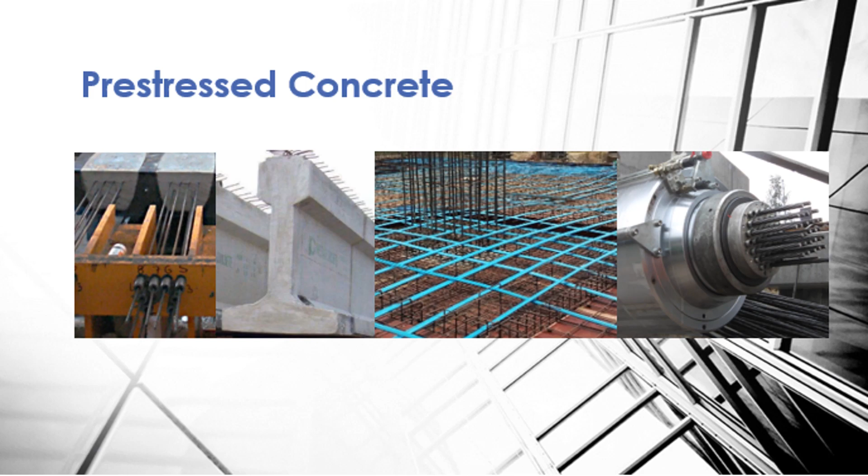As you know, concrete is very strong in compression and weak in tension. Therefore, a simply supported plain unreinforced concrete beam subjected to an increased load will fail immediately after the development of cracks. However, providing suitable steel reinforcement to the same beam can result in higher load carrying capacity.

As opposed to reinforced concrete, where the concrete is allowed to crack under service load, the original development of prestressed concrete was based on the prevention of flexural cracks forming under service loads. This was achieved by applying the criterion of no tensile stresses, because it is generally accepted that if there is no tensile stress present in the concrete, it will not crack. However, the design will depend on the requirement and the designer's choice.

With the subsequent development of the concept of partial prestressing, significant tension and controlled cracking are allowed to develop at service load levels, in much the same way as in reinforced concrete.

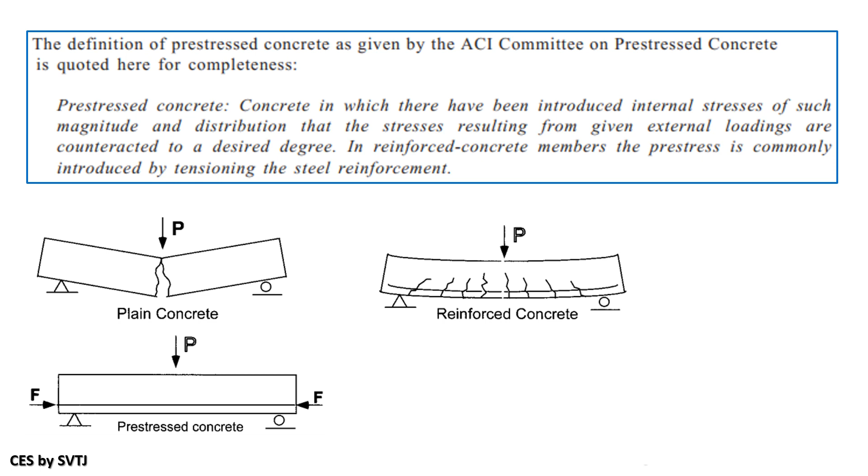In prestressed concrete, the most commonly used method of applying the prestressing force to the concrete is by tensioning high strength reinforcement, commonly referred to as tendons, against concrete prior to the application of imposed load. Two different processes can be distinguished in this regard. Pretensioning: in pretensioning, the prestressed reinforcement is tensioned before the concrete is placed. The other method is post-tensioning. In post-tensioning, the prestressed reinforcement is tensioned after concrete has been placed and has developed sufficient strength to sustain the induced stresses.

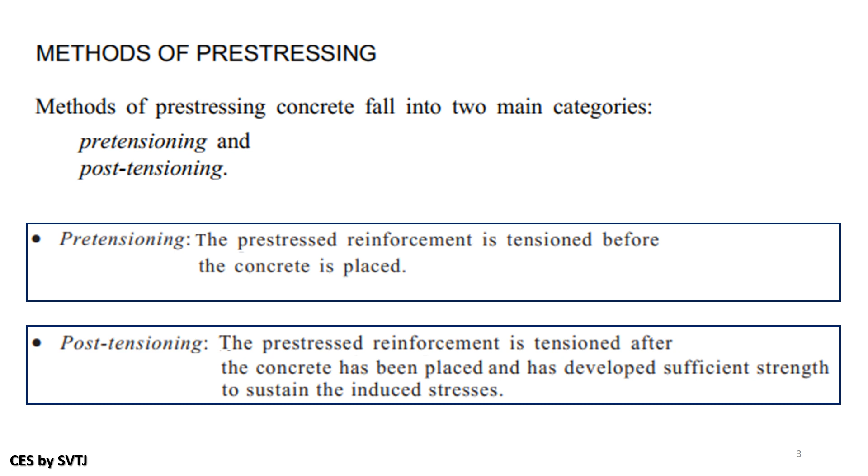An important difference between pretension and post-tension systems is that it is easy to incorporate curved tendons in post-tension systems. The flexible duct can be held to a curved shape while the concrete is poured around it. One advantage of post-tensioning over pretensioning is that the tensioning can be carried out in stages, for all tendons in a member or for some of them. This can be useful where the load is applied in well-defined stages.

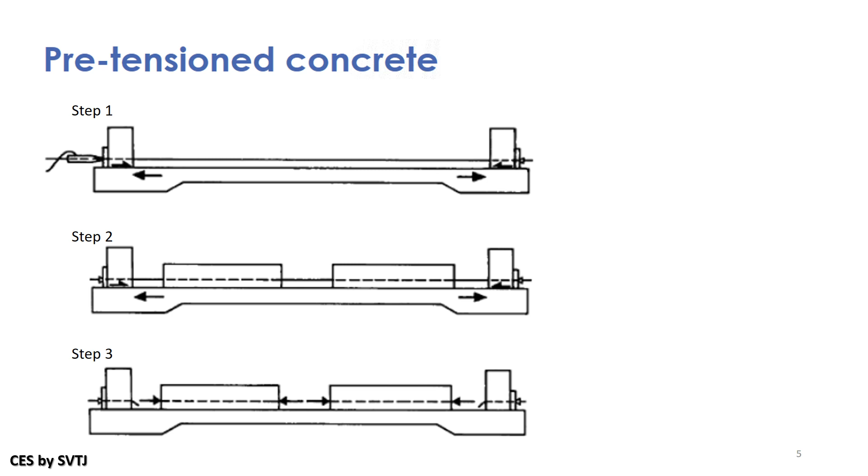Let's move to the details. Pretensioning. In pretensioning, wires or strands are tensioned between anchorages and the concrete member is cast around the tendons. Once the concrete has hardened sufficiently, the anchorages are released and the prestressing force is transferred to the concrete through the bond between the steel and concrete. The tendons are then cut away to produce the finished concrete member. A typical pretensioned beam design is given here.

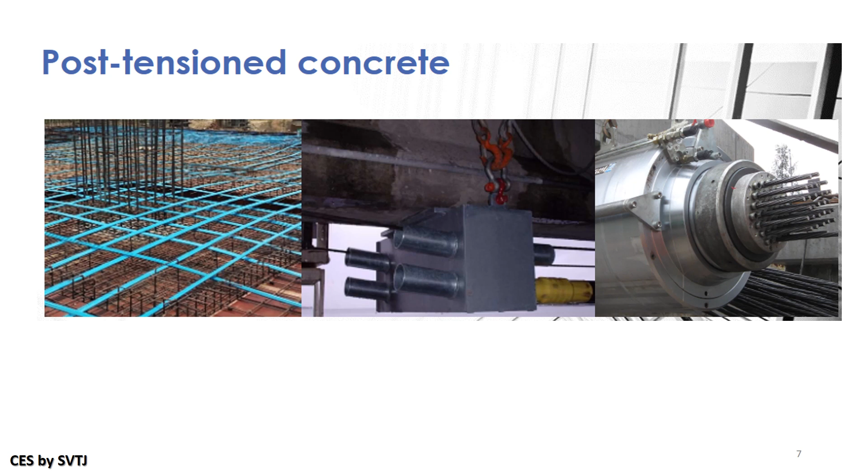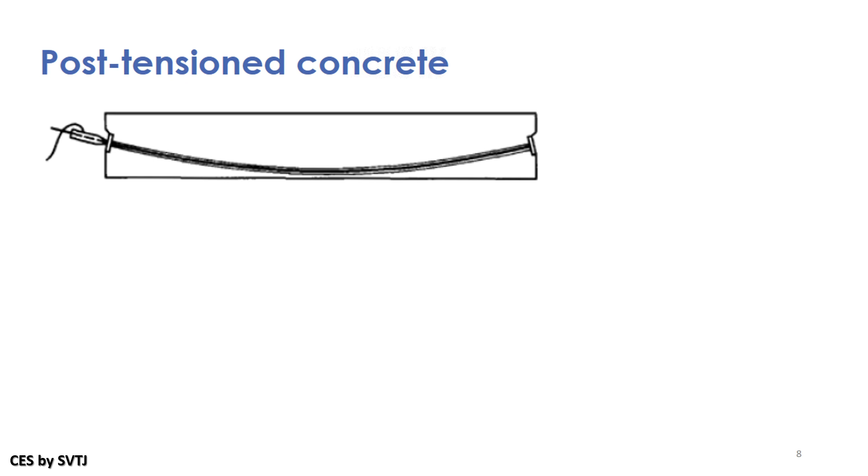Let's move to post-tensioning. The prestressing force is applied in this case by jacking steel tendons against an already cast concrete member. Nearly all in situ prestressing is carried out using this method. The tendons are threaded through ducts cast into the concrete or, in some cases, pass outside the concrete section. Once the tendons have been tensioned to their full force, the jacking force is transferred to the concrete through special built-in anchorages. A typical post-tensioned beam detail is shown here.